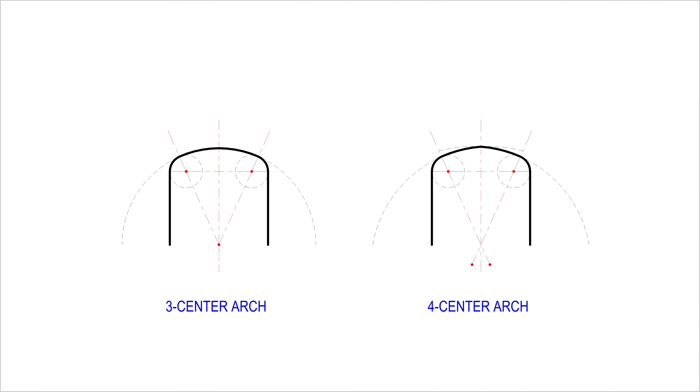There are two types of arches that I think are worth noting: the three-centered arch and the four-centered arch. The three-centered arch is informed by three radii, one at the middle and one at each side. Similarly, the four-centered arch is informed by four radii, two at the middle and one at each side.

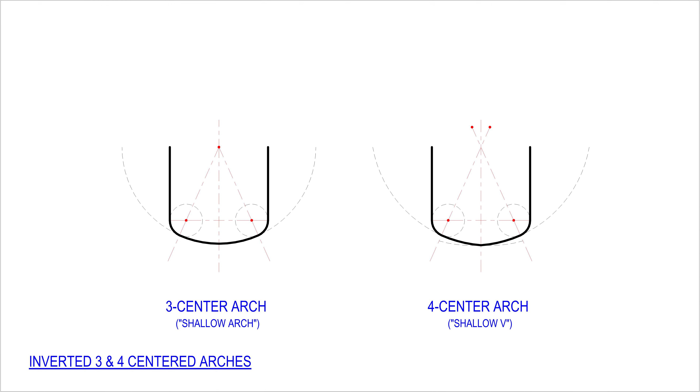For anyone who has been around canoes for a time, they will most certainly have heard the term shallow arch to describe the bottom shape of certain canoe hulls. Some would likewise be familiar with the term shallow V, a form iconic of Mad River canoes. With the drawings inverted, I can see that a three-centered arch forms a paddler's shallow arch, and the four-centered a shallow V. From here on, I will run with the three-centered arch as my prime example.

It seems likely that whatever ideas I discover with the three-centered arch, I can transfer similar thinking to the four-centered without too much trouble. Also, since I'm exploring the shape of a canoe hull specifically, I will keep the arch symmetrical about its center. This means the two smaller circles will share the same radius.

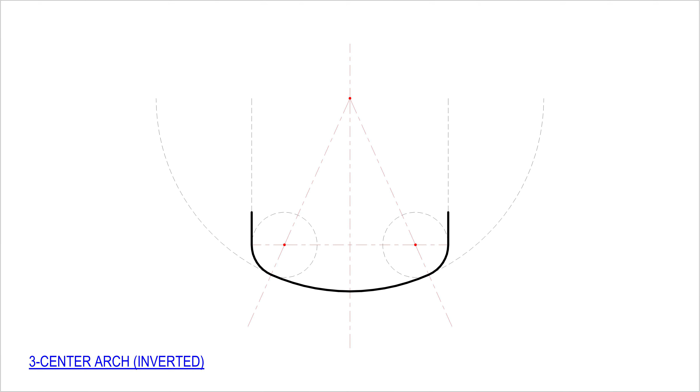If you're confused how what we're seeing is part of a canoe, adding the stems and gunwale to the drawing helped me to see that I'm looking at the transverse section. This is the shape that I would see if I cut a canoe in half across the carrying yoke. The transverse section can be considered in three main parts: the bottom, the chine, and the side. A chine is simply a change in the angle of the hull. In this case, it's the transition from the bottom to the side.

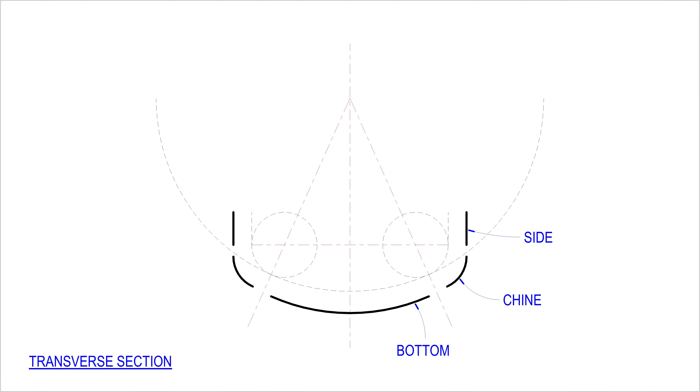Following the geometry of the arch, I can also see how shortening or extending the chine can add flare or tumblehome to the hull. Flare tends to keep a boat drier and more stable, while tumblehome eases a paddler's reach to the water.

Similarly, changing the center radius of the arch flattens or enhances the curve of the bottom. A very large radius begins to create a flat bottom, while a small radius creates a round. Very generally speaking, a flat bottom is more stable but less nimble, while a more round bottom is less stable but more nimble.

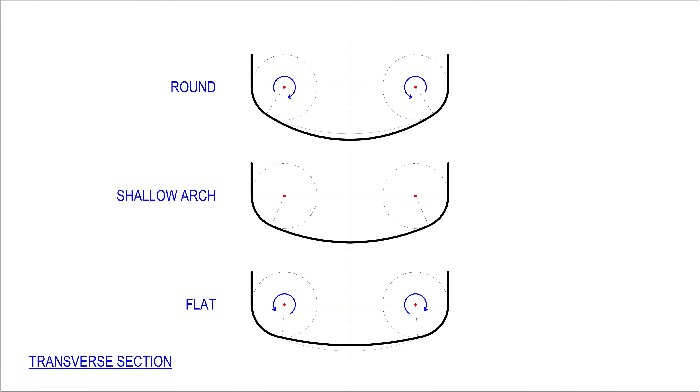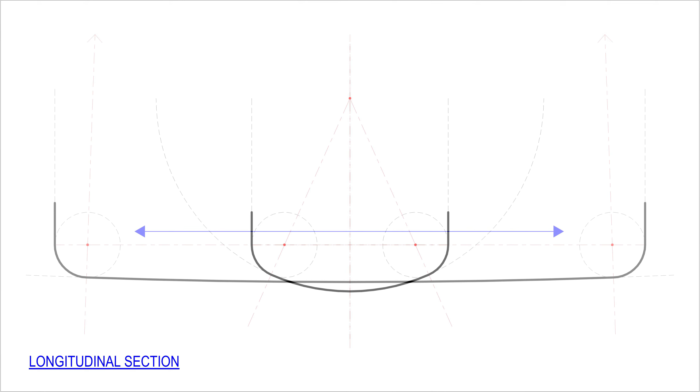It's at this point where things become very interesting to me. This is the point in the magic trick where I say, hold up, did I see that right? Because here I move on to the longitudinal section. And no, I haven't forgotten to advance the image. This is the longitudinal section. It too can be considered using a three-centered arch. Having increased the center radius by a considerable amount, it now feels more like I'm looking at a canoe that's cut down its length.

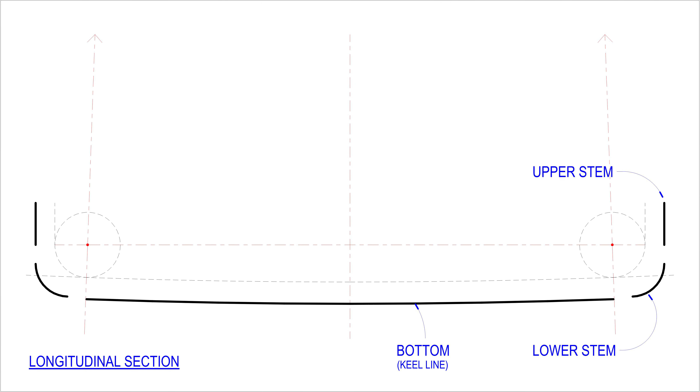Showing the gunwale helps me to visualize that I'm now looking at the side profile of a canoe rather than at the front. Just as in the transverse section I had identified 3 parts of geometry, here too I have identified the very same 3 parts, but will name them slightly different. The bottom, or the keel line, the lower stem, and the upper stem. In like fashion to the chines, shortening or extending the lower stems can give the bow or stern a flare or tumble home shape. While there are, I'm sure, other terms I could use for specific bow shapes, I will continue to use these just to keep things simple for me.

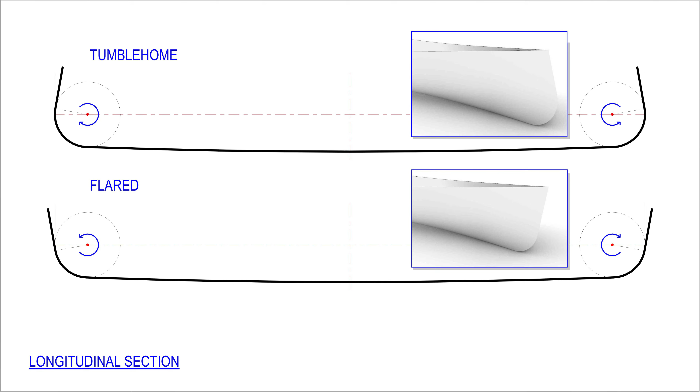Changing the length of the center radius informs the bottom of the boat, making it more flat by increasing the radius or more curved by decreasing the radius. The overall height of the curvature is called rocker. Generally speaking, a hull that is more flat front to back will likely track better and have a shallower draft, while a boat with rocker, which is more curved front to back, will be more maneuverable but have a slightly deeper draft. Draft is simply how deep a boat runs in the water and should not be confused with the rocker dimension.

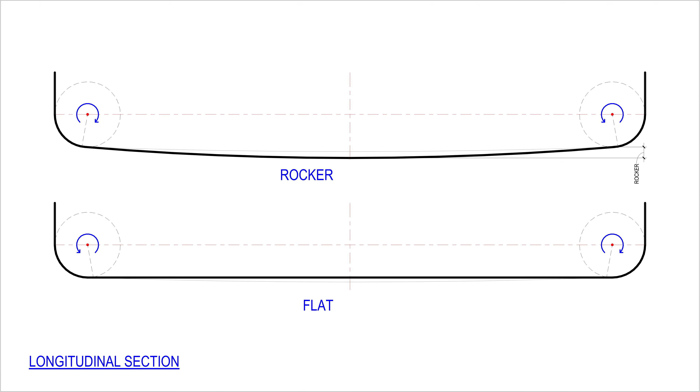Having considered both the longitudinal and transverse sections, I now want to move on to the top rim of the boat and consider the curves that make up the gunwales. Here, the 3-centered arch is no longer a good fit. Instead, I will utilize spline curves. While these are a digital version, creating long, complex curves in boat building has long been accomplished using flexible wood splines to create naturally smooth curves drawn through a collection of points.

This new curve is unique to the others I've looked at before now because this curve is 3-dimensional instead of 2. This curve has length, width, and depth. This means that I need 2 viewpoints to describe it, a top view and a side view. The curvature in the top view informs the fullness of the boat. A fuller boat spreads buoyant forces out toward its ends, sacrificing speed, allowing it to bob in waves and remain on top of rough water. A lively ride, but a good fit for whitewater canoes.

A less full boat streamlines its bow and stern, localizing its buoyant forces toward the middle of the hull. This attribute is common in racing and flatwater boats, like many popular models from Wenonah. When the boat strikes a small wave, the lack of volume at the bow allows the bow to penetrate the wave instead of climb the wave, offering a smoother and faster ride where stems remain close to the water's surface and maintain good tracking.

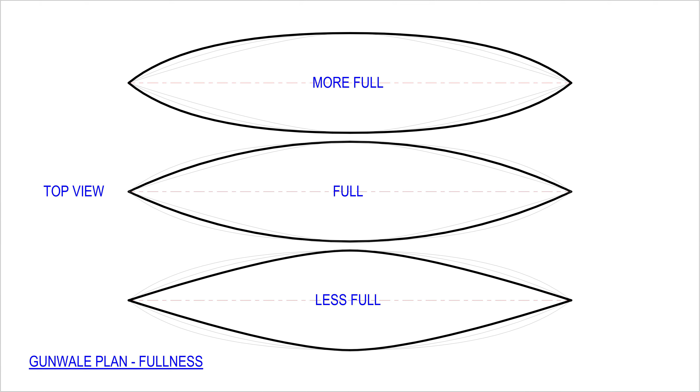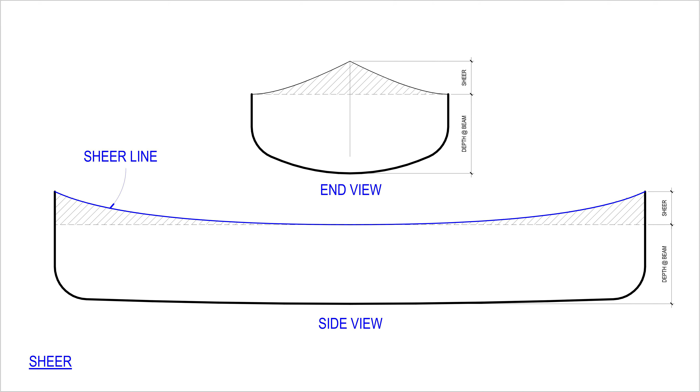The curvature of the gunwale in the side view, or the sheer line, informs the dryness of the boat, establishing the height of sheer over the length of the boat. Sheer is any additional height added to the sides of a hull to accommodate wave height. More is necessary at the front since that is where the boat is colliding with and parting waves. If waves are large enough and the sheer minimal, water will crash over into the front of a canoe, swamping the boat. A design sacrifice here is that too much sheer can act as a small sail, making a boat difficult to control on a windy day.

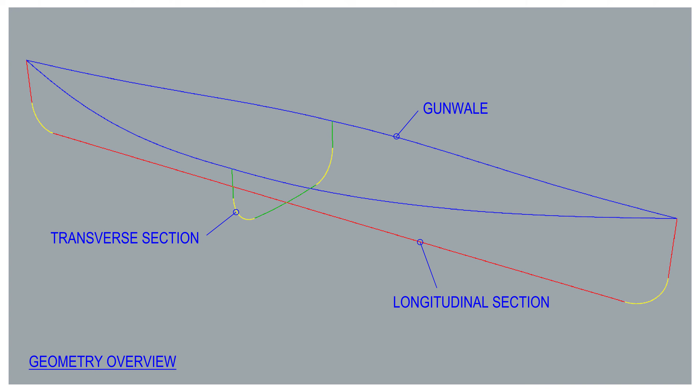In review, I've now identified and considered 3 major curves and the parameters that define them, which I can use to create a canoe hull: a transverse section, a longitudinal section, and the gunwale curve. To close my thoughts on canoe hull geometry, I will mention that I have neglected to talk about select foundational elements. Since my focus has been on the geometry or the shape of a canoe hull only, and not on the actual physics of the structure, I have not mentioned thwarts, decks, or gunwales and what role they play. I briefly mention them now only to recognize their important function in stabilizing the hull geometry I spoke of.

Think of the hull like a hard-shell taco. Until it's full of fixings to hold the sides apart, the taco is delicate and is more likely to collapse when held in the hand and squeezed. The thwarts and decks fix or hold the distance between the gunwales. Sometimes they act in tension, other times in compression, but at all times they hold the frame of a canoe's gunwales constant, like footings buried beneath a building, pinning the base of its columns together and stabilizing the building's structural geometry.

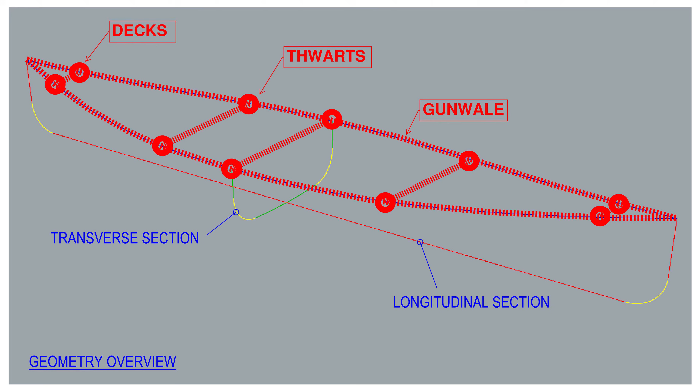I hope the information I have shared here has been informative, even if pieces of it fail to be perfectly accurate. Through this personal exploration, I now feel I have gained more understanding of that which underlies the beauty of a canoe hull, and I hope you have benefited from it too.